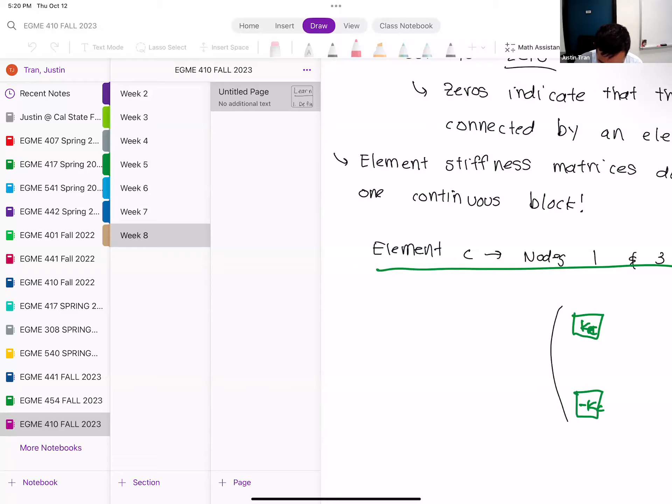Every year, it's terrible. I've done these in high school, because we go to the Long Beach Grand Prix every year. And I have a vision problem, like oh what's it, I just can't see myself coming to school. There you go.

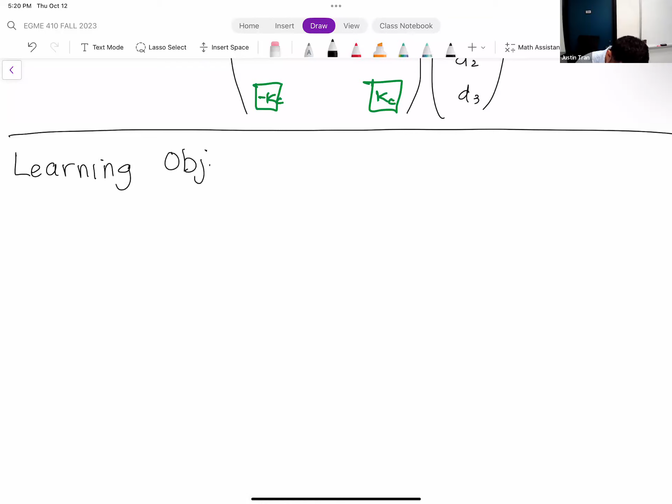I never told them that while I was there. Went back afterwards to pick up my diploma because I didn't want to wait for graduation night. I was talking with the dean back then, she's like 'you really missed like 4 days of school.' I went yeah, at the same time every year. She's like 'roughly about the same time.' I went yeah. She's like 'you could have been sick at that same exact time every year when I had a vision problem.'

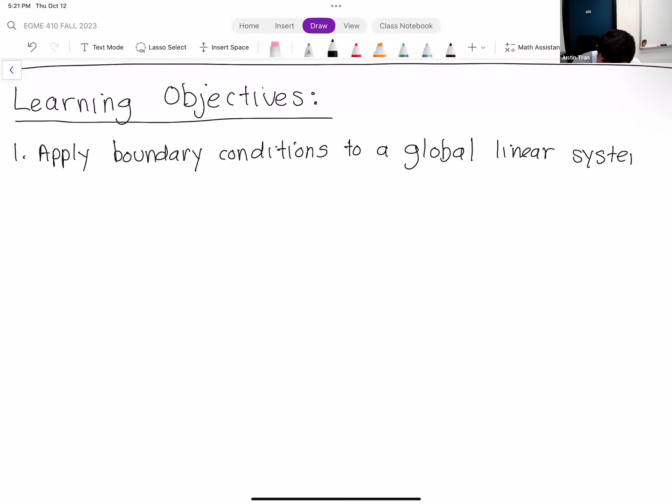Like what? Just couldn't see myself being here that one random Friday. Next year I may be missing one. Oh okay, work, can't pull that one on work.

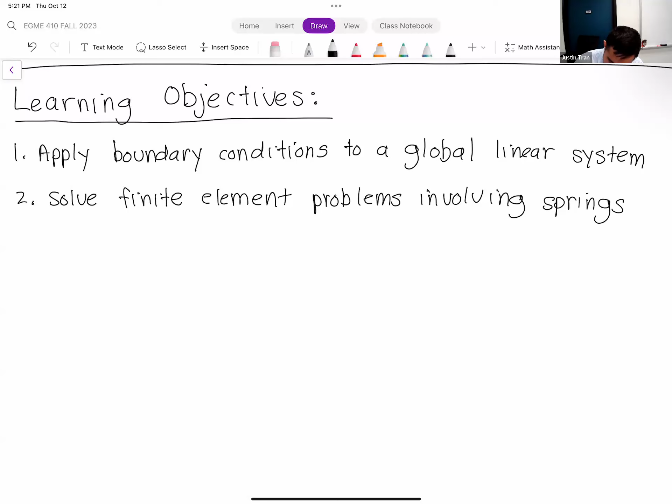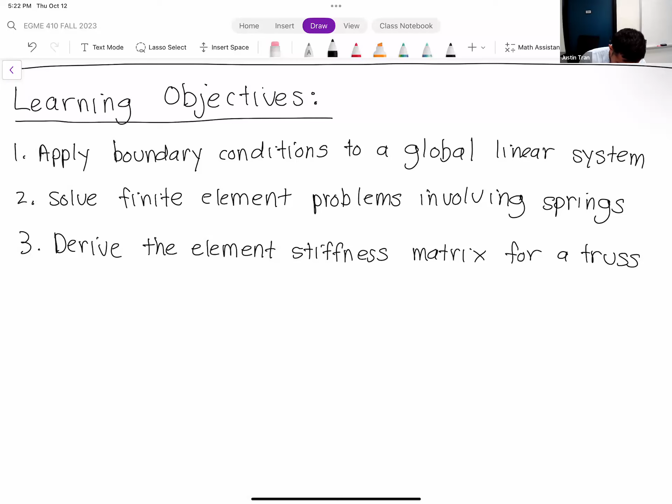Go to the career fair today? Yeah, go to the one next week too? Oh yeah I will go, because next week's is just the STEM one. Today we just did a general one, I didn't bother, how many companies for you? Next week's is going to be the big one, anyways I'll go there.

Anytime for the weekend? More planning, more planning.

When were they done, December? Basically right after the last week of classes, just like we got 8 weeks left. It's crunch time, I'm counting down the weeks. Me too, but for different reasons.

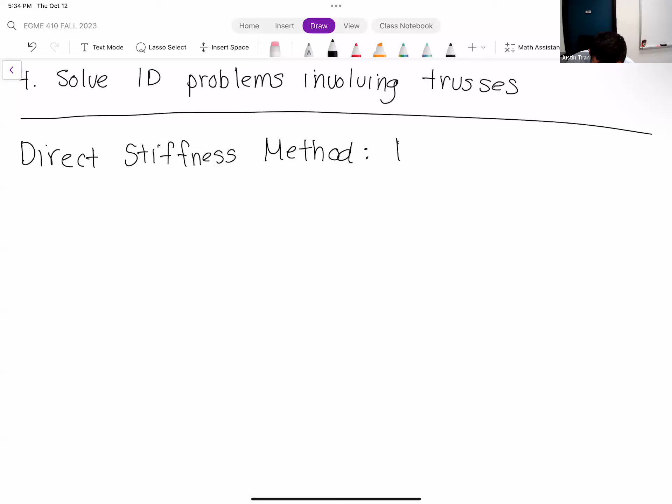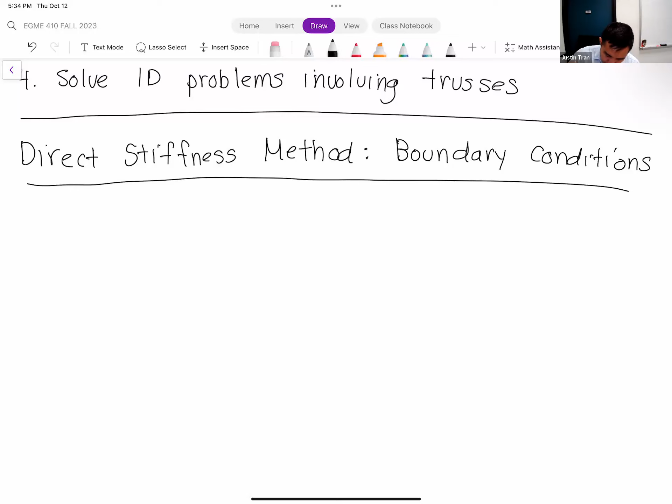And in particular, we were on the boundary conditions. Let me refresh our memory on what we did last time. So far, we have covered 2 steps of the direct stiffness method.

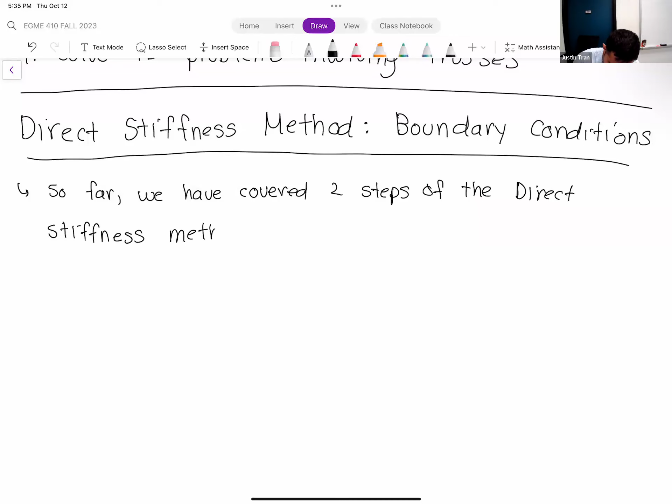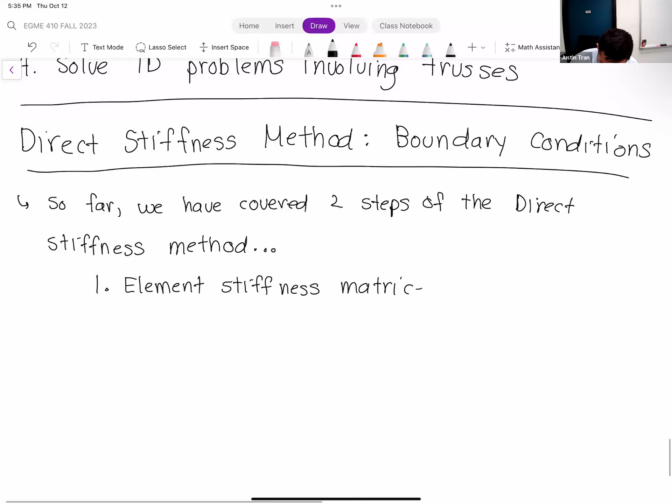The first step is this whole idea of element stiffness matrices. If you recall, whenever you have a finite element mesh, it's comprised of a lot of elements. The idea with the element stiffness matrix is that for each element, you create this matrix system - a system of linear equations that describe the physics of that element. You do this for every single element in your mesh, or discretization.

Step 2, once you have the element stiffness matrices for every element, is to assemble them all into one global system. Because ultimately we want to solve for the solution, which in our case is the deformation at all the nodes in our mesh. We can't do that unless everything is assembled into one big linear system. By the end of these 2 steps, we have a very large global linear system.

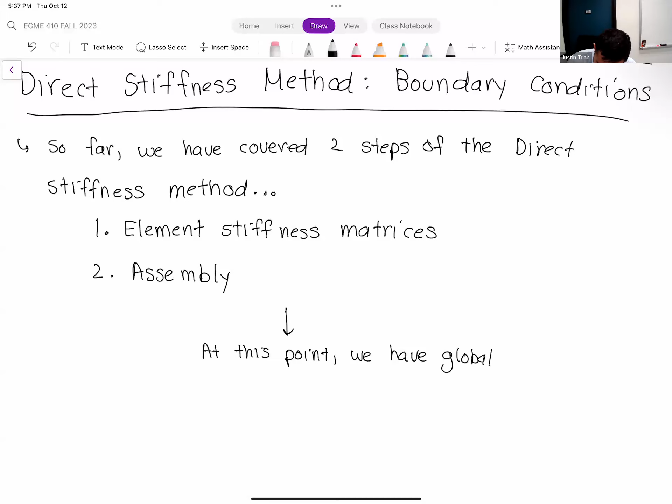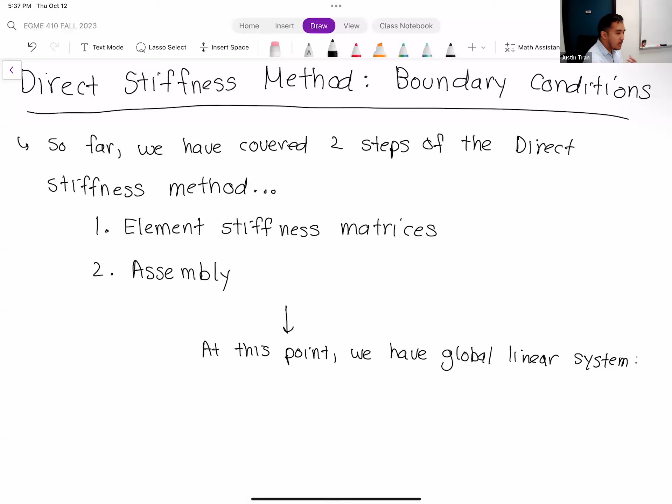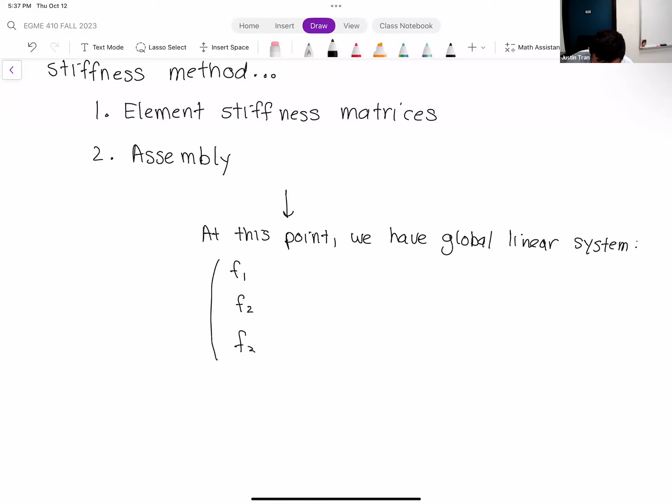The size of the global linear system depends on how many elements and nodes you have in your mesh. Let me write out the example we were working with, where we were in the middle of an issue. So for example, we have a 3-node system with 2 elements, which means our global linear system is going to be 3 by 3.

Our global linear system looks like this: Ka, minus Ka, 0, minus Ka. Right in the middle of the global linear system, we have the overlap between element A and element B, so this is Ka plus Kb. Then minus Kb, 0, minus Kb, and positive Kb.

But remember, we got this by inserting the element stiffness matrix for element A in the top left corner, because element A was connected to nodes 1 and 2. Then for element B, which was connected to nodes 2 and 3, when we inserted that element stiffness matrix into the global system, it would go in the bottom right corner, corresponding to nodes 2 and 3.

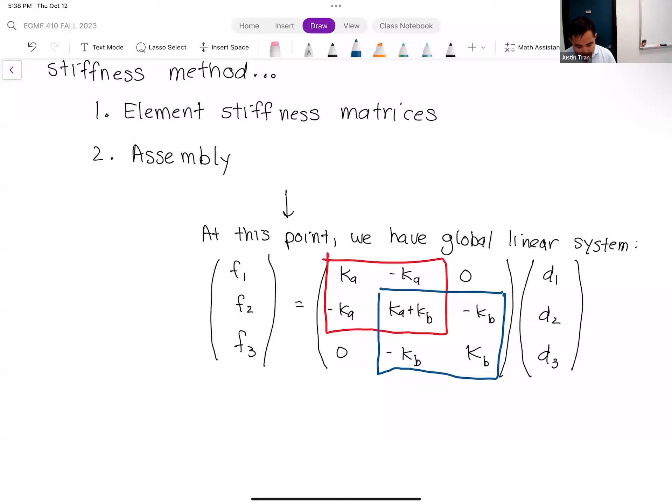So this is great - this is a good place to be, because now we basically have this global linear system.

And so ultimately, what we're going to do is, this global linear system here represents a big system of equations. In this particular case, we have 3 equations and 3 unknowns. So ultimately, we want to solve this for our unknown deformations.

Because the deformations D1, D2, and D3, those are all the unknowns. And in theory, we have everything we need to do that: 3 equations and 3 unknowns. So in theory, this should be possible.

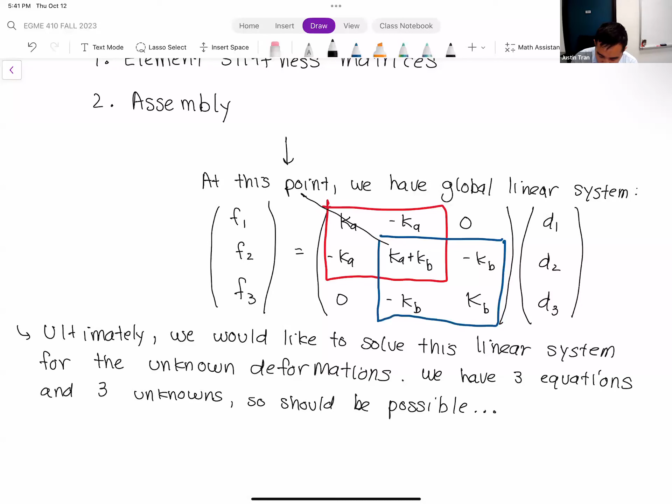So that's kind of the motivation for boundary conditions from a mathematical point of view. If you think about this from the physics side, it makes a lot of sense too, because we haven't applied any boundary conditions to this at all.

For all we know, for all the system represents, we just have 2 springs that are sitting next to each other on a table or something like that. There's no constraints, no loads, no forcing that's causing these springs to change. And so boundary conditions are going to give us basically the way to mathematically modify this into something that we can solve.

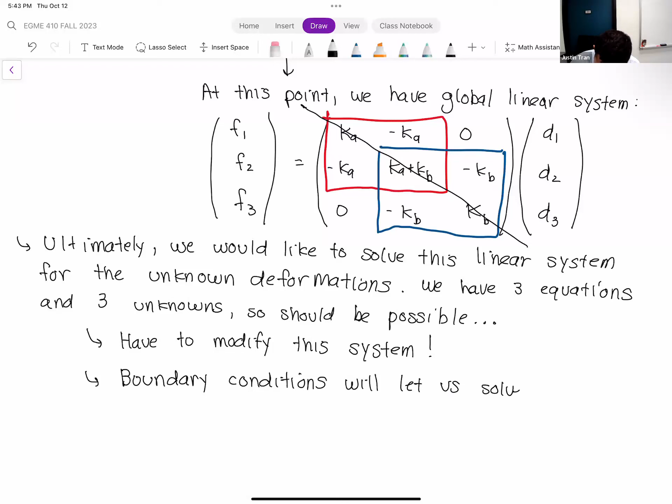So when we're applying boundary conditions in this case, I want you to think about them in terms of the boundary conditions modifying this linear system.

If you recall from our discussion of boundary conditions in ANSYS, we know that we have primarily 2 types of boundary conditions: constraint type boundary conditions and load type boundary conditions. So we're going to use that same distinction here, and each of them is going to have a unique mathematical effect on this system.

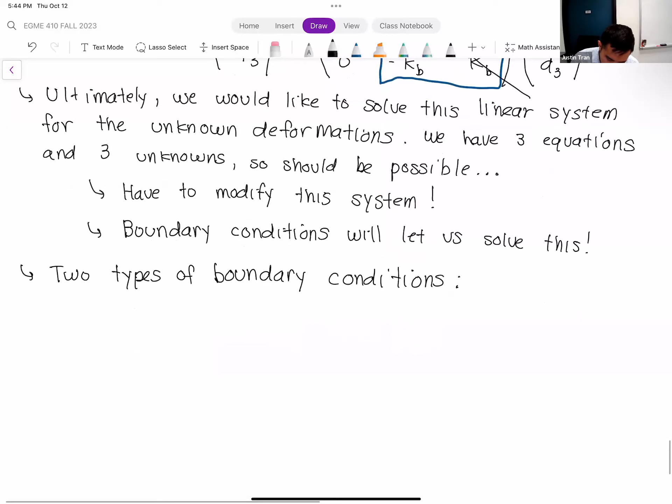So let's go over the constraint type boundary conditions first, and then we'll go over the load.

And remember, the other name for the constraint type boundary conditions is the Dirichlet boundary conditions. So you may hear me say that just subconsciously, just because that's how it is in my mind. But I'm going to try to use this terminology of constraint type, just because I think it's a little bit more physically easier to see.

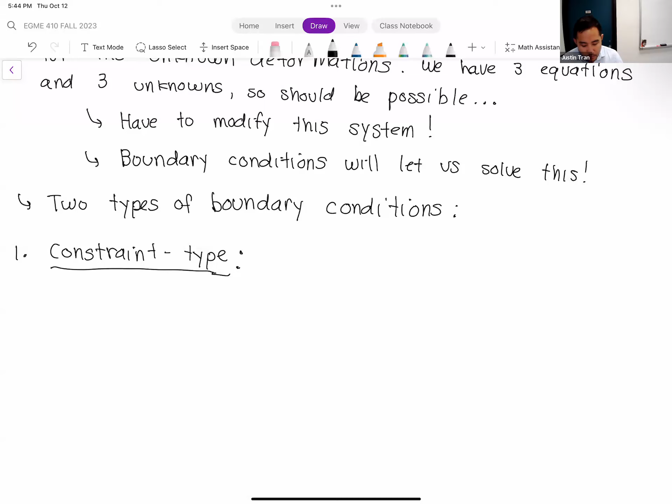And so if you recall from the constraint type boundary conditions, what they basically did was force the solution to have a certain value at the boundary condition.

And so our most common example for the constraint type boundary condition is our fixed support. We've applied this in every single ANSYS activity so far. And so the fixed support basically forces the deformation to be zero at the locations where we apply that boundary condition.

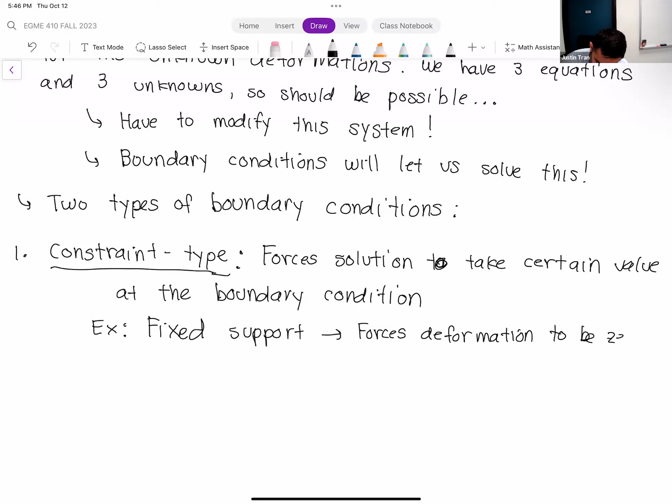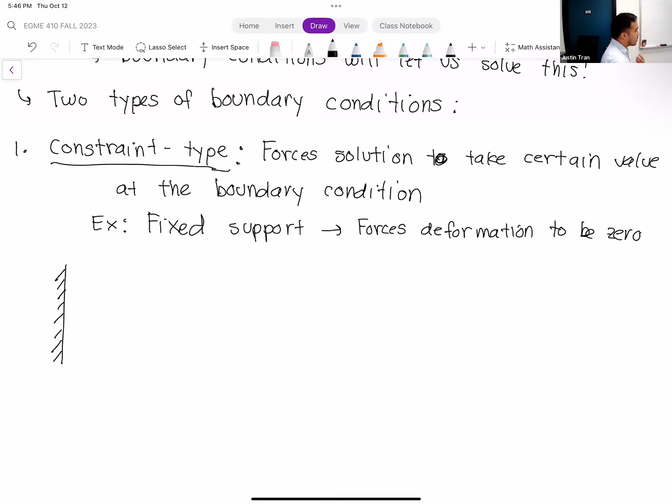So let's remind ourselves what our original geometry looked like, or what our original figure looked like for this problem, and let's see where we can apply our constraint type boundary condition. In this example, we had two springs connected end to end.

Node 1 was connected to the wall. Node 2 was the one that connects the two springs. And our two springs were labeled element A and element B. So we have KA and KB.

And so if we look at this configuration here, let's look in particular to node 1. So node 1 here is attached to that wall.

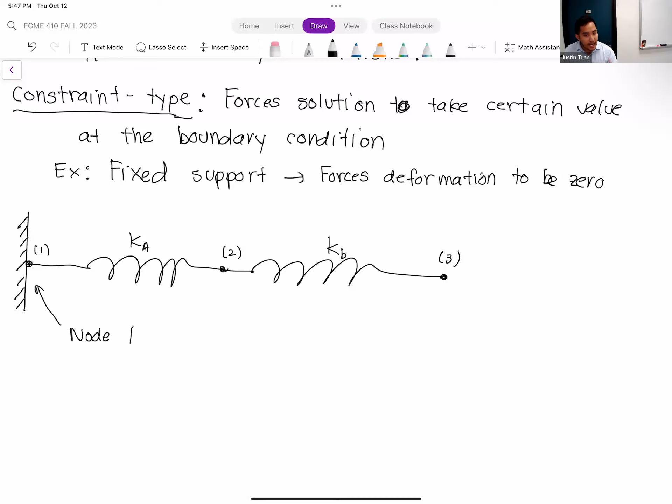And so if node 1 is attached to the wall, for all we know, that wall is fairly rigid, so that's not going to move. And so what we can basically say is that we can apply a fixed support boundary condition, or that's what the figure defines at node 1.

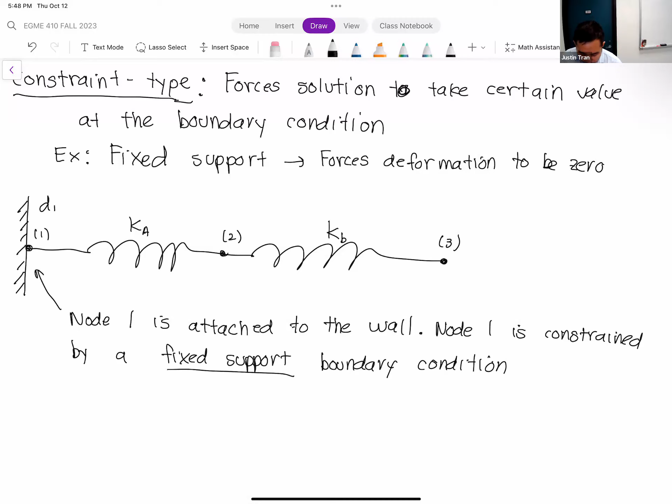So what do we know about fixed support boundary conditions? We know that the deformation there is going to be 0. We already have a label for the deformation in node 1 - we gave it the symbol D1. So if we're going to apply a fixed support boundary condition at node 1, that means D1 is going to be set equal to 0. And that's something we're just going to enforce - we're going to force it to happen.

So that makes sense, right? We have a node that's fixed to a wall, and if it's fixed to a wall, that means its deformation is going to be 0. Any questions on this so far? Okay, all right, so that's great.

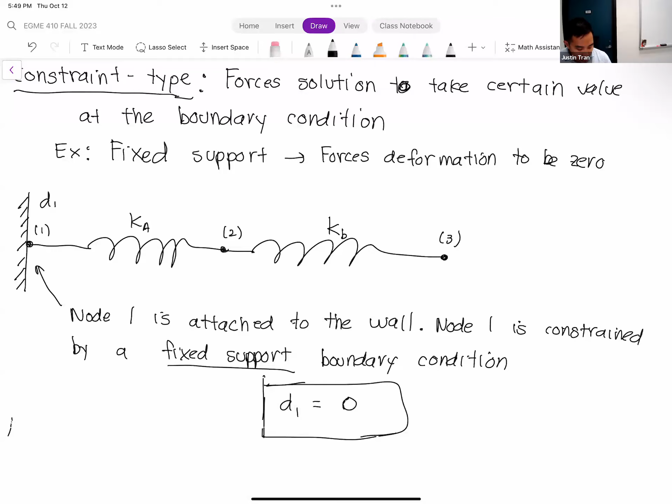Next thing I'm going to do is something kind of strange. I'm going to rewrite this equation. We have a very simple equation here, D1 is equal to 0, but let me rewrite it in a very strange way. Let me say this is the same as D1 plus 0 times D2 plus 0 times D3 equal to 0. In fact, taking this a step further, we can put a coefficient of 1 in front of D1. So these two equations here are exactly the same.

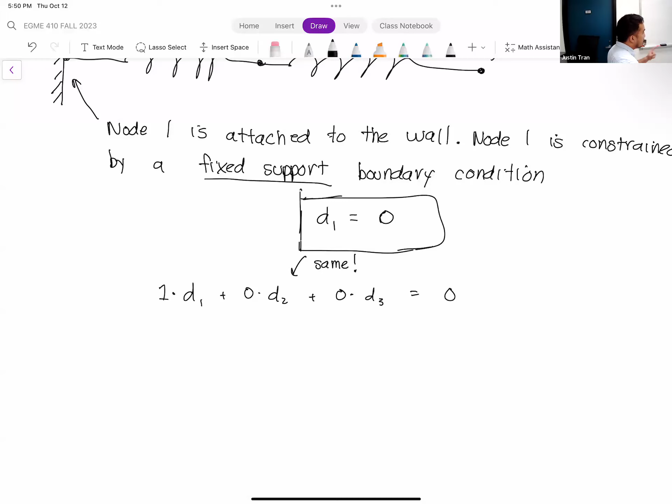So why did I do this? Well, you could say that I like writing math stuff, which is true. But when it's written in this form, we can actually write it in vector form, matrix form. Because what if we do this?

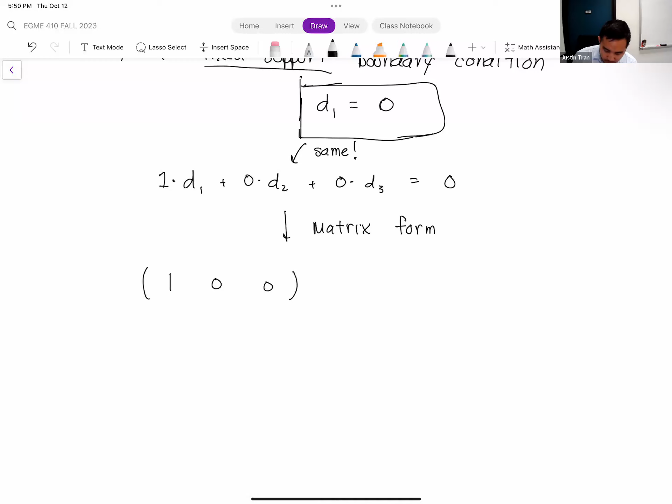What if I take all these coefficients - we know we have coefficients of 1, 0, 0. Let me put that into a row vector, and then multiply this by a column vector of D1, D2, D3. And all this is equal to 0. You know that if you take a row vector and multiply by a column vector, it's basically like taking the dot product between those two. If you take the dot product between those two shown vectors, you're going to get the same thing as above, which is the exact same thing as the box equation at the top.

So why would I do this? Why would I go through this trouble of putting that equation, which was already kind of too long, into a matrix equation, which is even bigger? Because now that we have it in this form, we can actually incorporate this into our global linear system.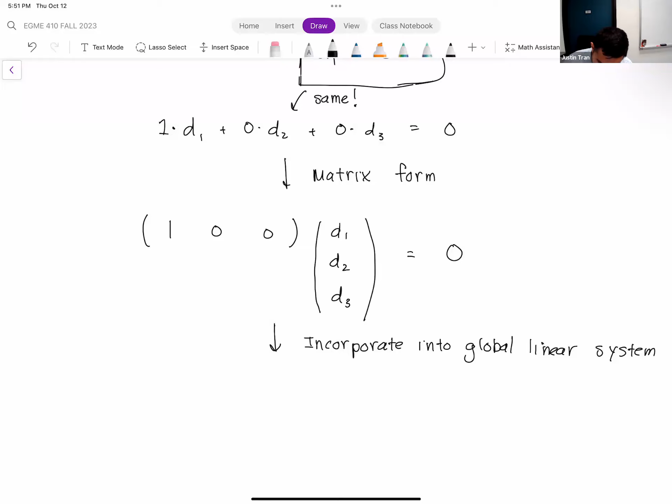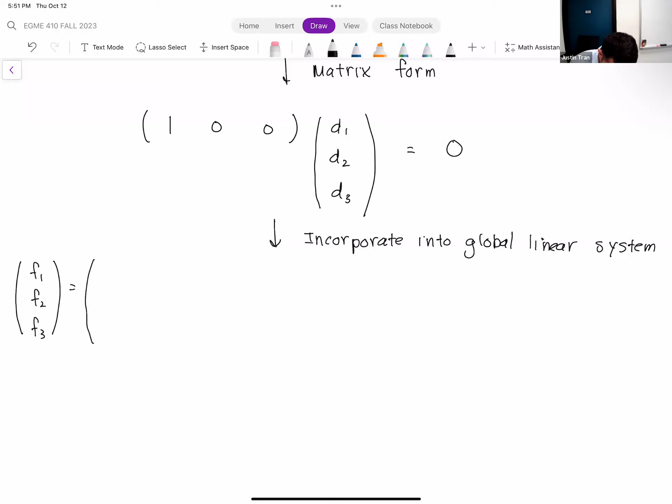Let me go ahead and draw out or write out our global linear system one more time. For this problem with 3 nodes, it looks something like this. And all this is multiplied by D1, D2. So that's what we have so far.

But what I want to do is incorporate this boundary condition equation into this matrix. Let's do this - we know that this boundary condition is acting on D1. In fact, we have a 1 in that D1 slot. So let me take this first row of this matrix here and replace it with the equation I have above, because you can see we have some similarities.

Just like the matrix equation above, we're multiplying it by this column vector of D1, D2, D3, so that's the same. And as part of the matrix, we have a 3-entry wide row, and this is actually kind of the perfect length for that as well. And then instead of F1 - this F1 represents the right-hand side of that equation, though technically right now it's on the left side - if we replace this with 0, then we can incorporate that entire equation into our matrix.

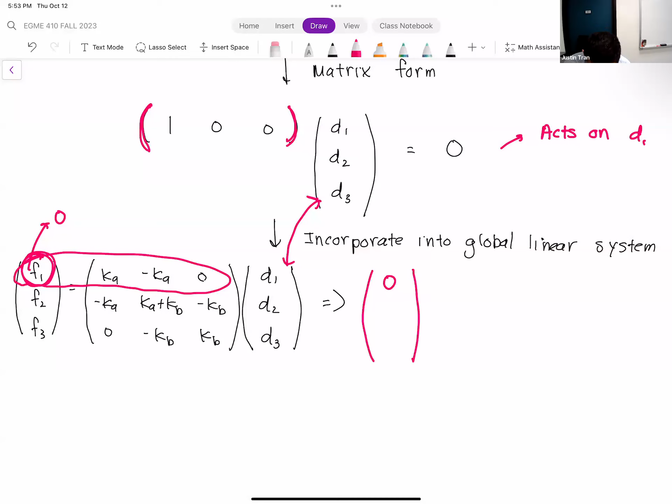In other words, we're going to replace that first row in the matrix with this equation. So we have 0 plugged in for F1, and then on the matrix side here we have 1, 0, 0. Everything else stays the same - so we have D1, D2, D3, and the remaining matrix entries.

And so since we have a constraint type boundary condition on node 1, we replace that entire first row of that matrix with that boundary.

And if you look at our new linear system on the right there, you can see that we've broken the symmetry. So it's no longer a symmetric system. And this is something that'll be much easier to solve.

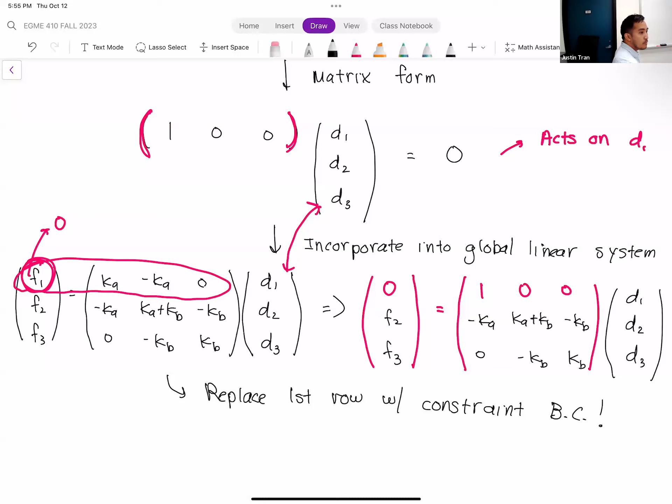Any questions on what we did here? Okay, so that's how you deal with constraint type boundary conditions. So whenever you have a fixed support or any kind of constraint or displacement, mathematically what's happening is that you're replacing an entire row in a linear system.

All right, so let's look at the other type of boundary condition, which is the load type boundary condition.

Remember the load type boundary conditions when we talked about it in ANSYS is any kind of forcing term. Whether that be just a literal force, it could be a pressure, I know some people are playing around with torques on the midterm assignment, these all fall in that category. But for our purposes, for now, while we're doing springs and trusses, we're only going to consider force boundary conditions.

And in fact, we're going to go a step further, and we're going to assume that those force boundary conditions are only going to be applied directly on the nodes.

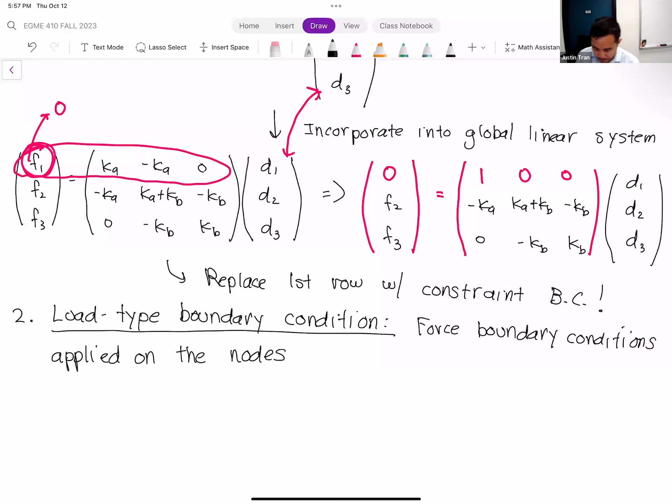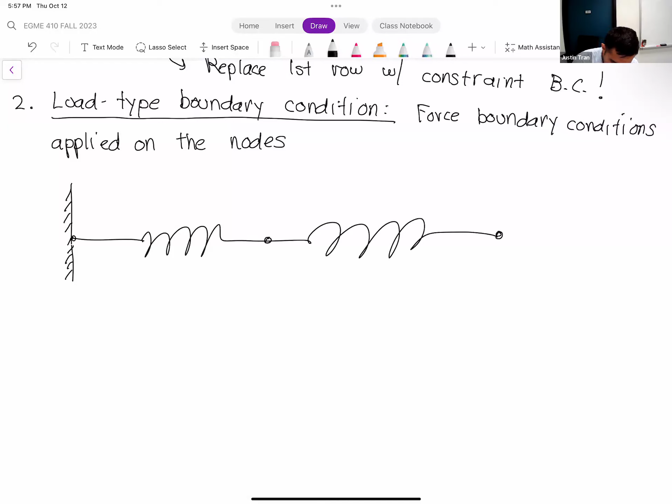All right, so let me go ahead and draw our system one more time. One, two, three, A, B. So here's our two spring system, 3 nodes. We've already dealt with node 1, so node 1 is already taken care of.

The other thing that we didn't account for yet is that we have a forcing on the system. So we're applying a horizontal force F, a tensile force F, going to the right. So this is basically saying that we have a force type boundary condition being applied at node 3.

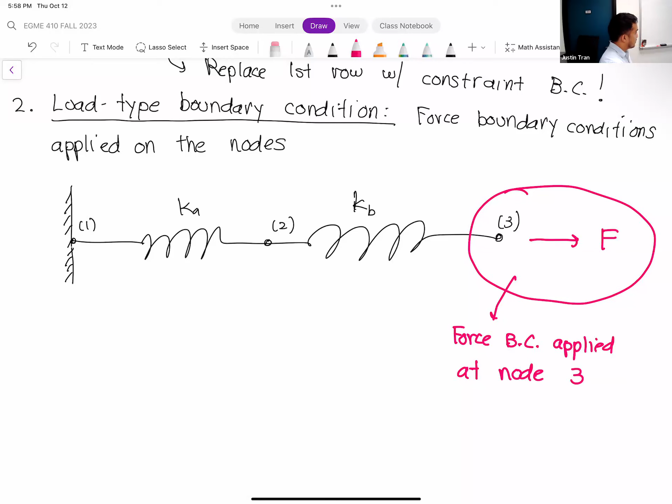Let me kind of rewrite our current linear system. Actually, it's right here, so I'll just scroll up a little bit.

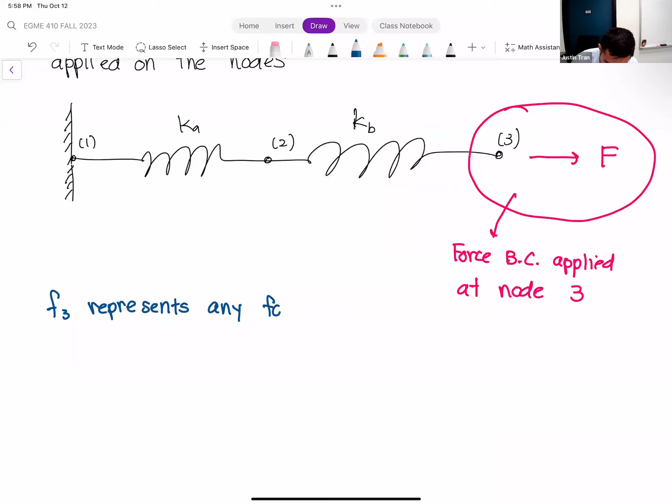All right, so we have a force of capital F being applied at node 3. Luckily, by the way that we've drawn our system, we already have a variable there that describes the force being applied at node 3. That's F3. So little f3 represents any force being applied on node.

And so with that in mind, we can take our external force here, F, and then just replace little f3 by it.

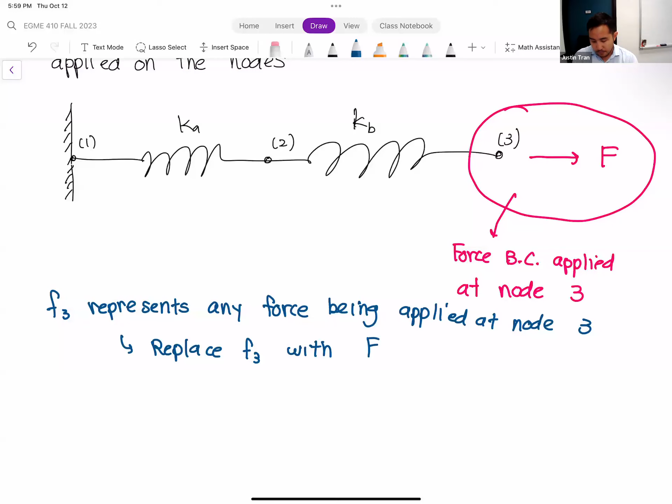All right, so if little f3 already represents the external force being applied on that node, let's go ahead and just replace that variable. Instead of little f3, we're going to have just f right here.

That's good. And so the only thing that we have to plug in for now is little f2.

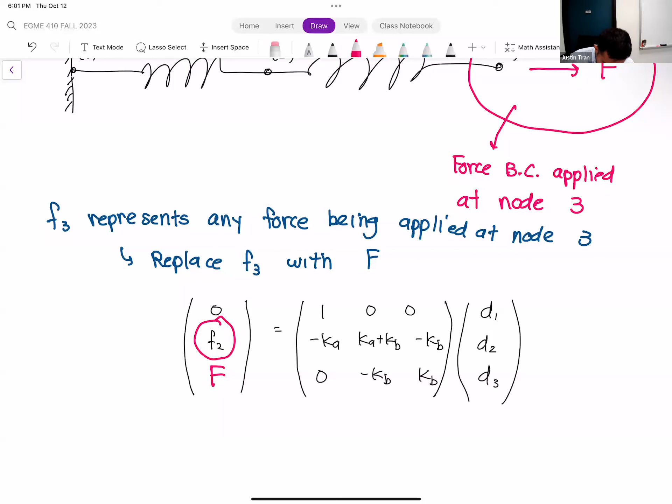And so let's go back to our diagram here for our springs, and let's look to see if we have any forces being applied at node 2. If you look at node 2 right there, node 2 is the one right in between the two springs. We don't have any external forces being applied there, nor do we have any kind of constraints.

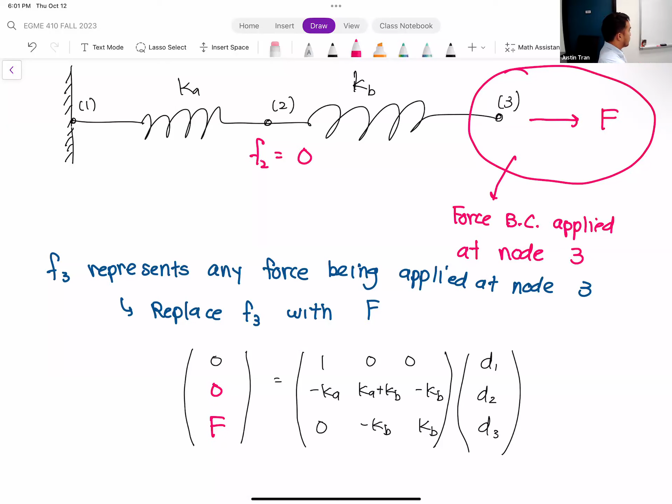And so what we can say is that F2 is equal to 0, right? There's no force being applied there. So let's go ahead and plug in 0 for F2 in our global units. So that's it. Now that we have the system in this form, we are now ready to solve.

And so to sum up what we just did: for the constraint type boundary conditions, you take that constraint and replace an entire row in the linear system. For a load type boundary condition, you only input the forces directly into the forcing vector.

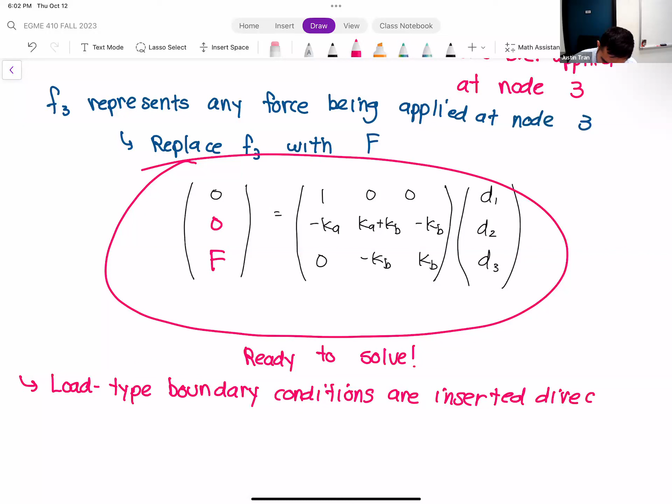Okay, and so when you have load type boundary conditions, you don't make any changes to the stiffness matrix.

So load type boundary conditions are actually a lot easier to deal with, just because you only have to insert them in one place.

All right, and so technically, if we had numbers for this, we could solve the system. So we have a system of 3 equations and 3 unknowns. But you'll be glad to hear that I actually don't force you to find the solution. This is actually where I have everyone stop. Because even though you guys should know how to solve a system of 3 equations, 3 unknowns, it's mostly a tedious exercise. So usually once you get to this point, I say that you're either done, or we may use either a calculator or MATLAB to solve the system.

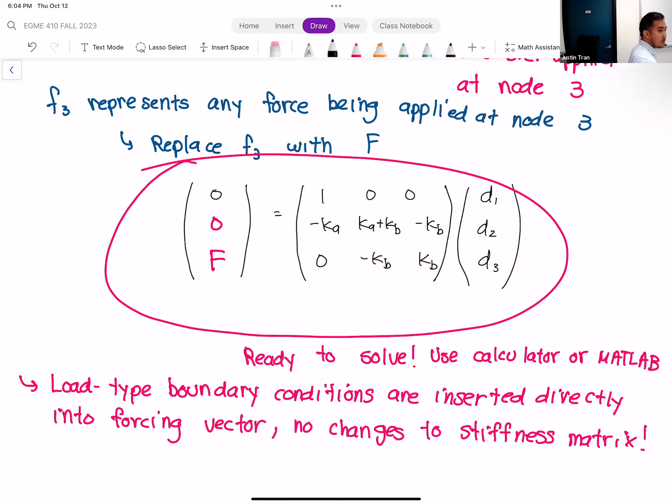Okay, any questions on this before we jump into another example? Okay, all right, so let's do another example. Let's kind of put it all together. We've done one example already, I guess, but I was kind of narrating the whole time. So let's put it all together so we can see it all happen.

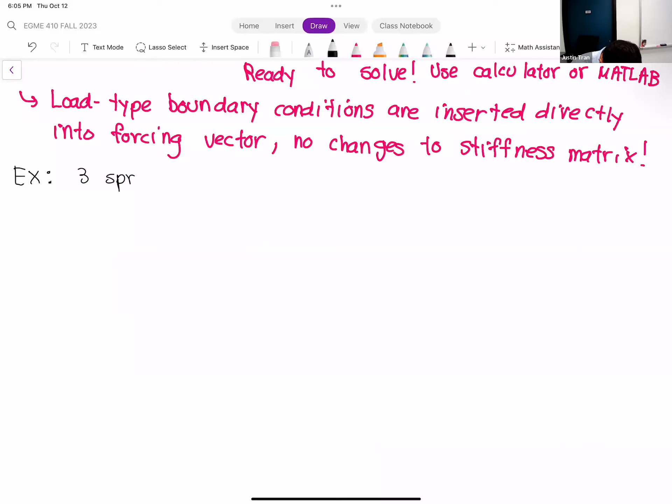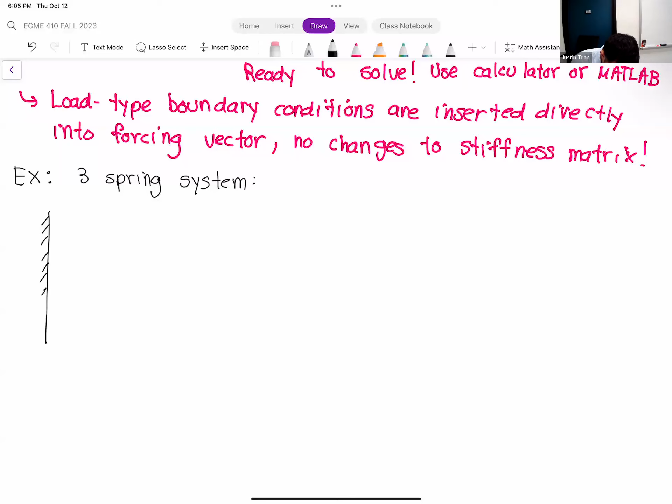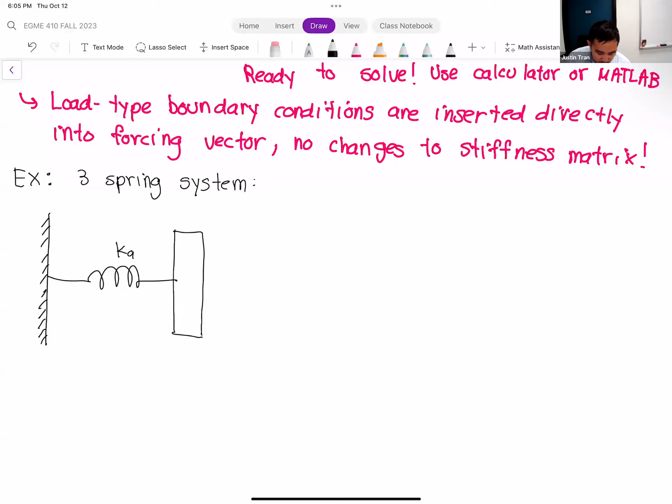Okay, and so in this system we have a 3-element system, so we have 3 springs. We're gonna have a fixed wall here on the left side. We're gonna have one spring come off the wall, and we'll say this spring has a constant Ka. We're gonna say that this spring is connected to a wooden block. And this block is connected to 2 other springs on the right, so we have one spring like this, and another spring. The top one we'll call KB, the bottom one we'll call KC.

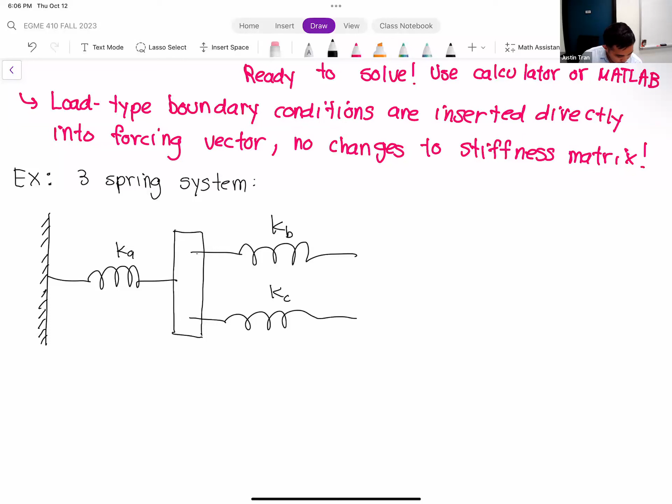So let's go ahead and label all of these nodes. Starting from left to right, we have the node that's attached to the wall, so we'll call that node 1. The next node that we're going to label is actually the entire wooden block, and we're going to assume that that wooden block is rigid, so it's going to move together. We'll call this wooden block node 2, and that pertains to everything here.

So we're basically assuming that all 3 springs are connected together at that wooden block, because they're all going to move together. We have the top node that's on the right side of spring B, so we'll call that node 3. And then we have the right node on spring C, so we'll call that node 4. And so in terms of forces on the system, we have 2 forces. We're gonna have one force that's being applied to the right on spring B, so we'll call that F3. And then we're going to have another force that's acting in compression on spring C, we'll call that F4.

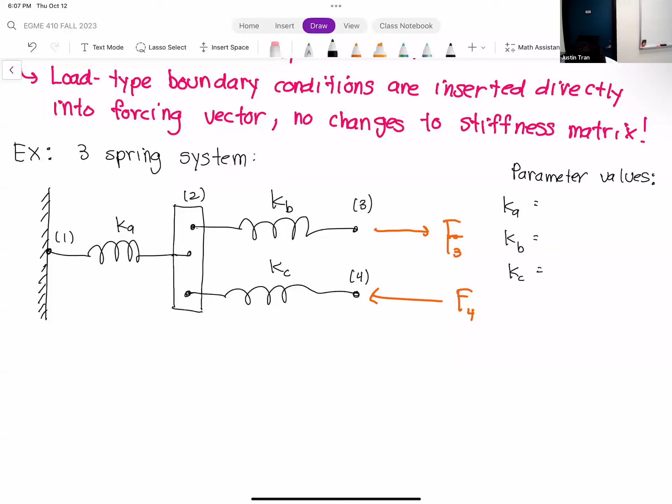So since the last example we did with all symbols, let me give you some numbers for this problem here. Let me go ahead and label all these spring constants first. So we have Ka, the spring constant of Ka we'll assume is 500 newtons per meter. Kb we'll assume is 100 newtons per meter. Kc is 250 newtons per meter. And then for the forces, we have an F3, we're going to assume F3 has a magnitude of 100 newtons. And F4, we're going to assume has a magnitude of 50.

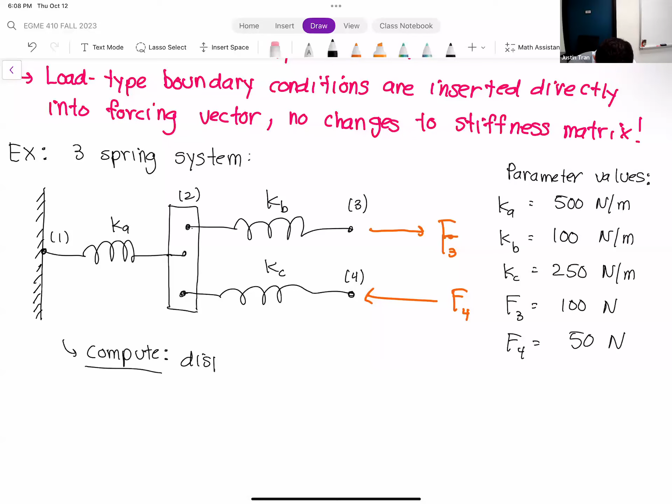All right, and so we're going to take this system here, and what we're interested in is solving for the displacements or the deformations at every point. We want to find just how all of the nodes are going to move around as a result of this forcing and constraints.

Okay, any questions on just the setup for the problem? This is what we can expect, something like this, yes. So kind of the process that we're going to go through is basically what I expect us to do, and we'll get it all the way up until this point, up until the linear system. But I'm not going to ask you to actually solve that, so we'll just get up here.

All right, so this is a very classical kind of direct stiffness problem, and let's go ahead and apply our method. The first step in the direct stiffness method is to discretize the system and label all of the elements and nodes. So that's already done for you, that's usually going to be the case, and just to make sure that all of the answers are consistent, I do all the labeling for you. So we can go ahead and jump to the next step, which is the element stiffness matrices.

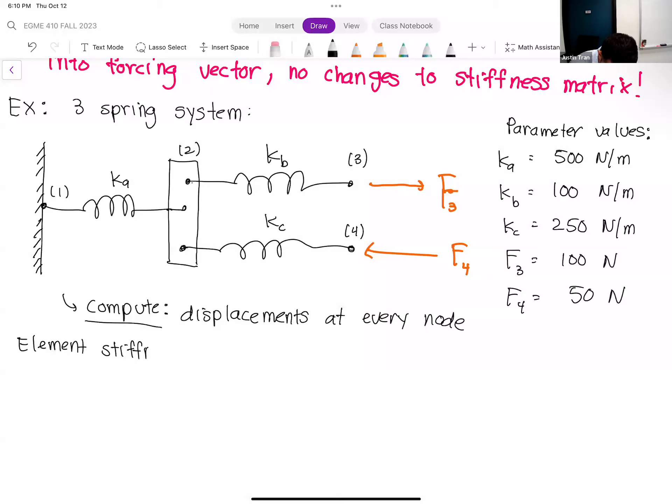And so for every element in this system, we're going to write its 2 by 2 element stiffness matrix.

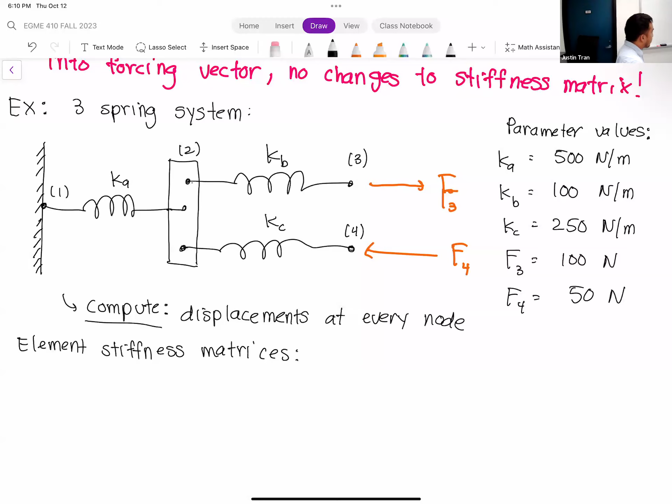Okay, so let's start with element A. This is a 2 by 2 element stiffness matrix. First of all, we know element A is connected to nodes 1 and 2, and we're going to see that reflected in its element stiffness matrix. So the F1, F2 vector is equal to... Element A is a spring, and so it's going to be KA, minus KA, minus KA, KA. And since element A is connected to nodes 1 and 2, this is multiplied by D1, D2.

If you plug in for KA here, since we have its values, we have F1, F2 equal to 500, minus 500, minus 500, 500, times D1, D2.

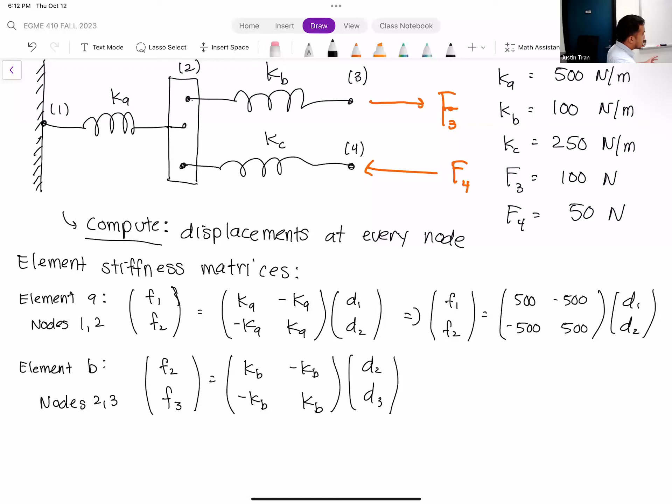Of course, you can plug in for KB as well — I think KB was 100. You can do that, but just for the sake of time, I'm just going to leave it like that.

Now we're going to do the same thing for element C. Element C is connected to nodes 2 and 4, so this one's going to be interesting, since these are two nodes that aren't directly next to each other in the number line. When we assemble this, it's going to be interesting — we talked about it at the end of class last time, but you actually get to see it in action when you have an element stiffness matrix like this that's kind of separated out.

So for nodes 2 and 4, that means we're going to have F2, F4 equal to KC, minus KC, minus KC, KC, times D2, D4.

So that is the first step in our direct stiffness method: writing out all of the element stiffness matrices. Usually this step is not that difficult, it's just a lot of writing, so it's kind of tedious, especially if you're plugging in numbers ahead of time. Actually, I like to wait until the end to plug in, just to limit the amount of writing. But for some people it helps to see the numbers as you go through it, so feel free to do that as well.

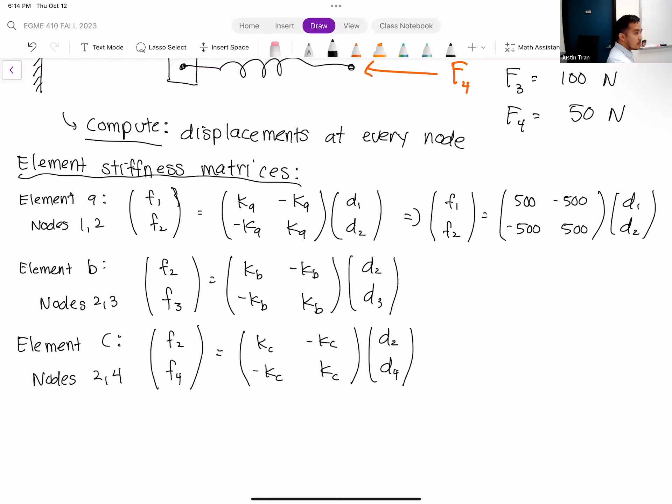Any questions on this so far? Okay, all right, so let's move on to the next step.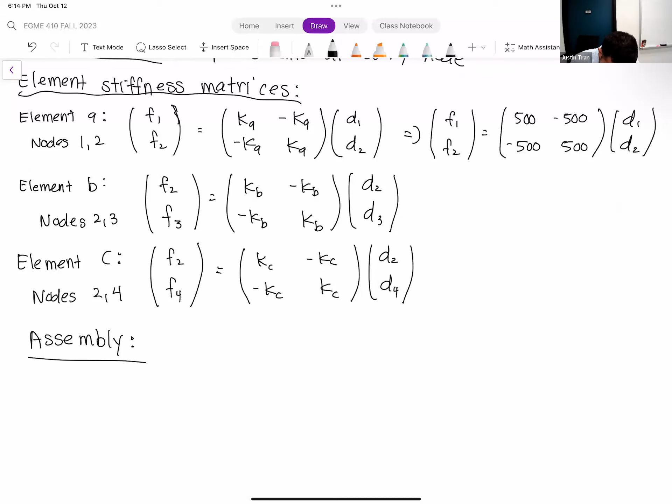Next step is assembly. Let's go ahead and assemble all of these into one global linear system. Our global system here is going to be a little bit bigger than our last example because we have 4 nodes. So since we have 4 nodes, that means our global linear system would be a 4x4 matrix, a 4x4 linear system.

All right, so let me go ahead and write that out. I'm going to write it a little bit big just to give us some room to write stuff in, and let me label the columns too. Okay, so here is our 4x4 system.

And so we're going to be basically inserting our element stiffness matrices into their appropriate spots.

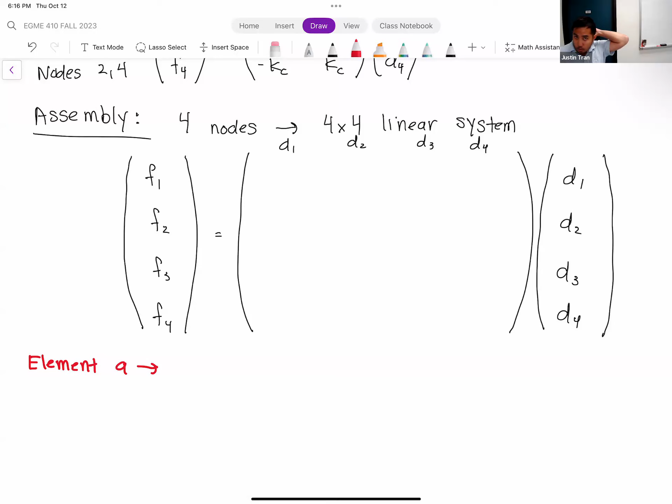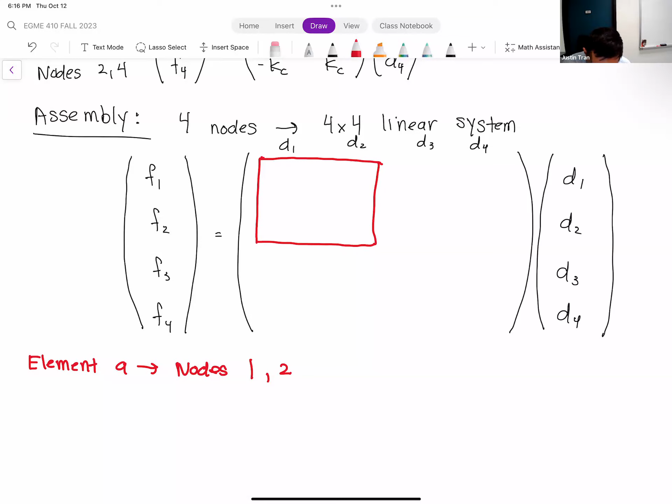All right, let's start with element A. We know element A is connected to nodes 1 and 2, so we're basically going to look at the first 2 rows and the first 2 columns, and we're going to see where they intersect — they intersect at that box. Let's go ahead and write it in variable form now, just so it's a little bit easier to see what's going on, and then we'll plug in numbers afterwards.

Okay, so that's element A. Let's do element B. Element B here is nodes 2 and 3, so we're going to go to basically the second and third column and second and third row, and we're going to see where they intersect — they intersect basically like that. Let's go ahead and write in the entries for element B here.

Let me go ahead and leave a little bit more room, because whenever we have overlapping elements like this, we're going to add their components. So in that one overlap square, we're going to have KA plus KB. All the others have no overlap, so we have minus KB, and a positive KB.

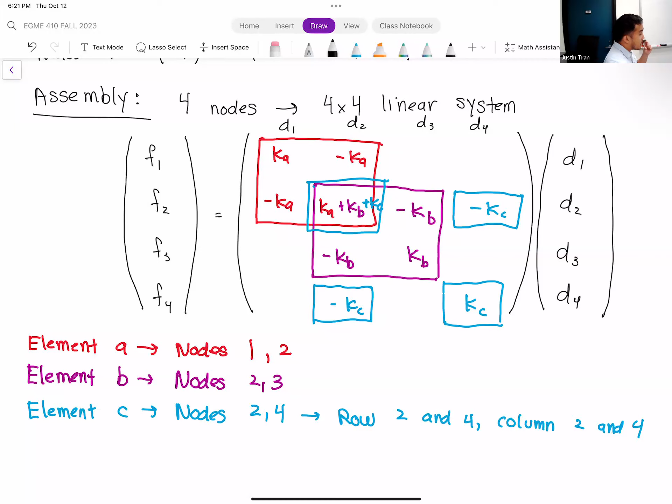And so that's all three elements, so everyone is accounted for. Remember, whenever you have an area that's not connected or not covered by an element stiffness matrix, we're just going to put 0. So we're going to have 0, 0, 0, 0, 0.

All right, so that's the assembly step, and so we've gone ahead and assembled our linear system. Any questions on this step here? Okay.

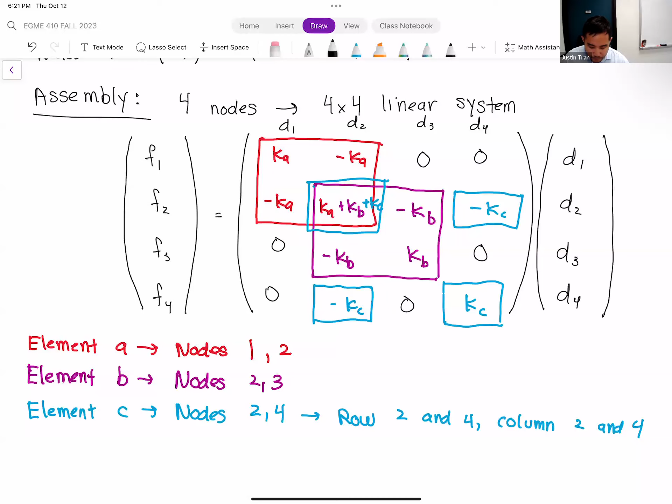All right, so that's assembly, and the last thing we're going to do is basically the technique we learned today, which is the boundary conditions. We have 3 boundary conditions on this system, and we need to make sure we account for them. The first boundary condition is a fixed support on node 1.

Our second boundary condition is going to be a load type boundary condition, and it's going to be a load of F3 being applied on node 3.

And then finally, our last boundary condition, we have a second load.

We have to be a little bit careful here because that load on node 4 is actually going to the left. So even though we have our matrix system here, we're still going to respect the positive and negative directions of the x and y. Eventually we get to the y direction, but for now we're going to respect the direction in the x direction. Since F4 is being applied to the left, we're going to insert that into our linear system as a negative F4, and that's being applied on node 4.

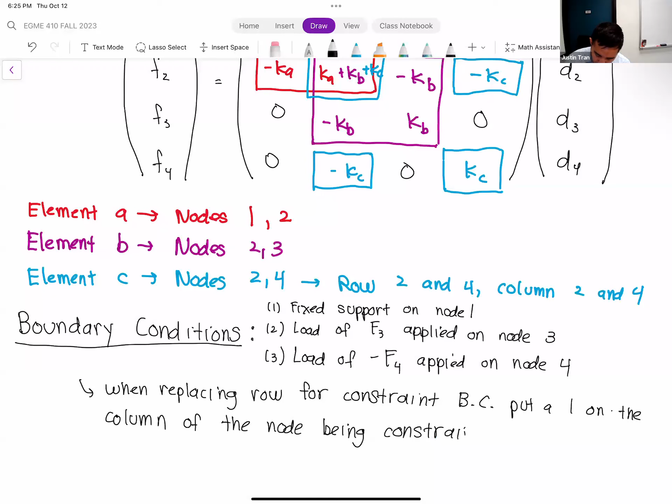So if you do it correctly, what you should end up with is that the 1 should always be in the diagonal slot. If we change this example, say we're applying a fixed support on node 4, we replace the 4th row of the matrix and put the 1 on the 4th column. So the 1 should always be on the diagonal entry of the matrix.

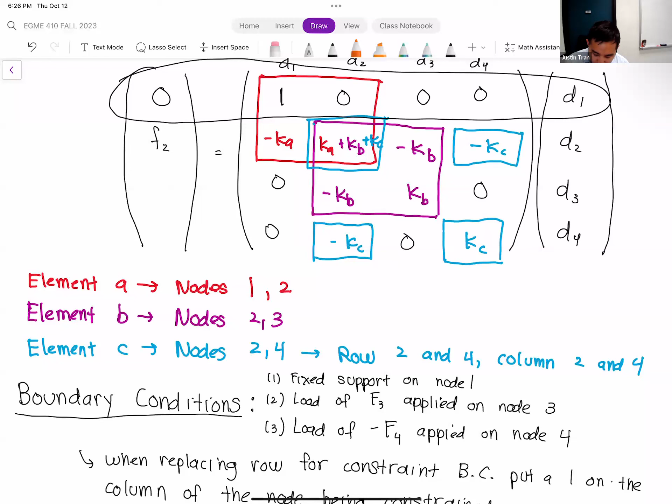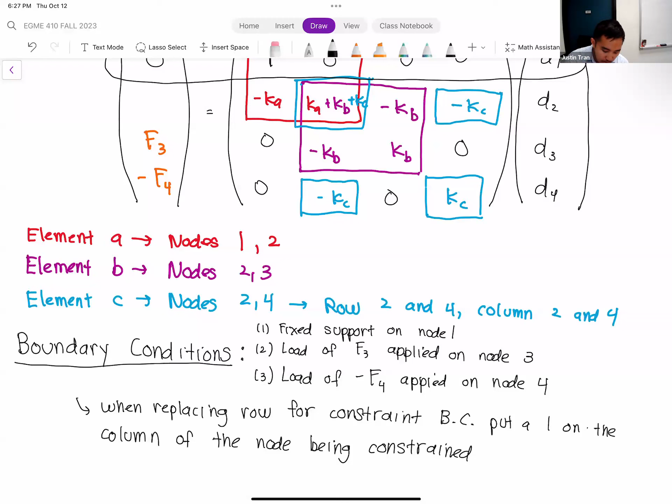All right, so that's the constraint boundary condition for node 1. Let's apply the boundary conditions on node 3 and 4. These are pretty simple, so we just apply our values in the appropriate spot. Since we have a load of positive F3 on node 3, we put a positive F3 in the forcing vector. And since we have a force of F4 on node 4, we put a minus F4 in that slot. The last thing is to replace the middle, F2. Since we don't have any loads or constraints on F2, we just put a 0 there.

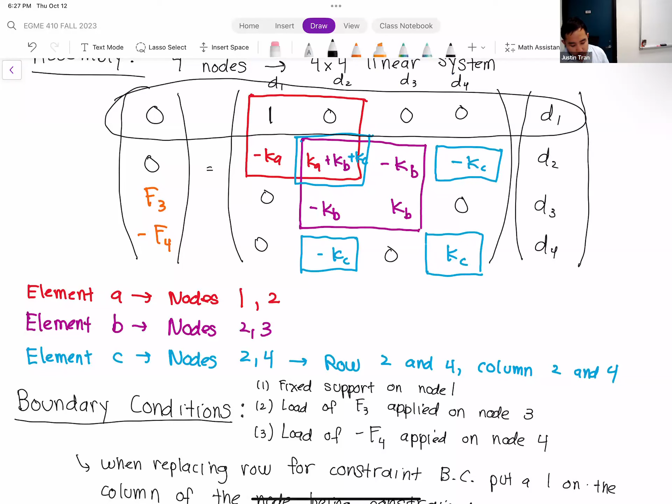All right, and that's it. That's our answer. So of course, the last thing we can do is plug in the numbers. Let me go ahead and do that.

So we plug in the numbers here. On the left-hand side, for the forces, we have a positive 100 for F3, minus 50 for F4. For the matrix, our first row is just 1, 0, 0, 0. Second row, we have minus Ka, so Ka is 500, so minus 500. Next, we have Ka plus Kb plus Kc: Ka is 500, Kb is 100, and Kc is 250, so adding those together you get 850, which goes in the party slot. The rest of the row has minus Kb and minus Kc, so minus 100, minus 250. Next row: 0, minus 100, 100, 0. And the last row: 0, minus 250, 0, 250.